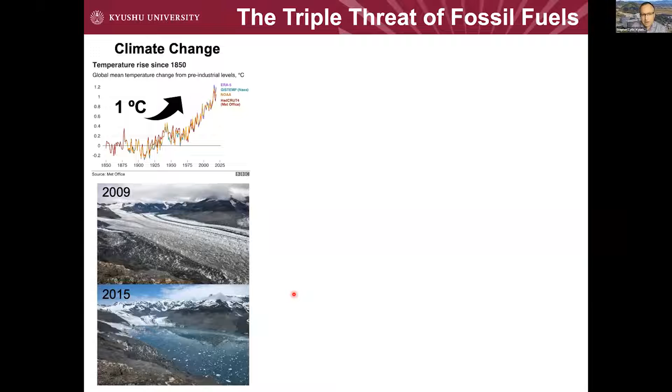So just for the context, and I'm sure you're all aware of this, but I like to think of this issue in terms of the triple threat of fossil fuels. I think everybody is very familiar with the concept of climate change and the problems associated with that. And this is a very serious issue. But we also have the issue of public health. When we're burning fossil fuels, we're releasing many particles into the atmosphere and other pollutants, especially PM2.5. And this causes serious issues with the air quality. This is a really major health issue in the world, supposedly killing something like 1 in every 6 people in the world, basically. The third threat of fossil fuels is energy security.

So this has always been an issue. We have things like the Gulf War and the oil shock in the 70s, which makes it difficult for some nations to get hold of sufficient energy resources. And especially at the moment, we're seeing this with the war in Ukraine, where basically Europe is very dependent on Russian oil, and when something happens, this becomes a big issue in terms of the politics and in terms of getting energy to people directly.

So the real thing we want to do is to stop burning fossil fuels. That's going to solve a lot of issues. And the solution at the moment is mainly through solar energy and wind energy, also through things like nuclear and tidal energy as well. But solar and wind are the main solutions. And the amount of installed energy of these types of technologies is really increasing now, which is very good. We have issues though with these technologies, so we can't electrify everything, and we need to use this electricity effectively.

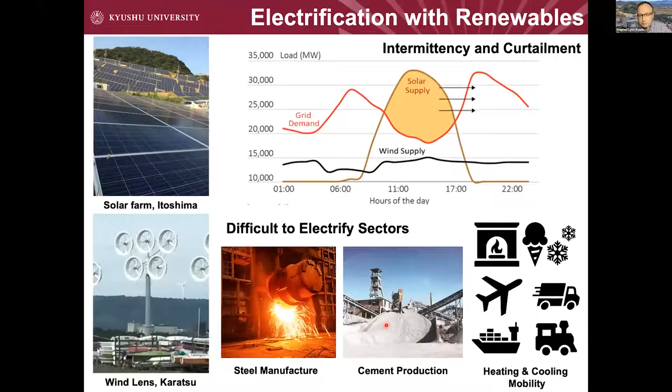So one of the energy storage solutions at the moment would be batteries. So lithium-ion batteries have really come on a long way in the last few decades, and they're kind of really a part of our everyday lives now. So I'm sure all of you are looking at a device which has a lithium-ion battery in it right now. So they can be used for large-scale storage.

There are issues with batteries as well, though. So batteries are really suited for short-term energy storage. So you can't use this battery to store energy over a period of months or over seasonal timescales. It's really for a few seconds or a few hours to balance out the grid demand and supply. The same with the battery electric vehicles. You're not storing energy in them for months and months. You're using the energy very quickly.

In addition, the materials that we use in batteries, so the main materials are lithium, obviously, they're called lithium-ion batteries, cobalt and graphite. These are all classed as critical raw materials. These are materials that are economically important but have limited supply. So as we scale up the production of battery electric vehicles, these materials will become bottlenecks. We may have trouble to scale up the manufacture of batteries around the world.

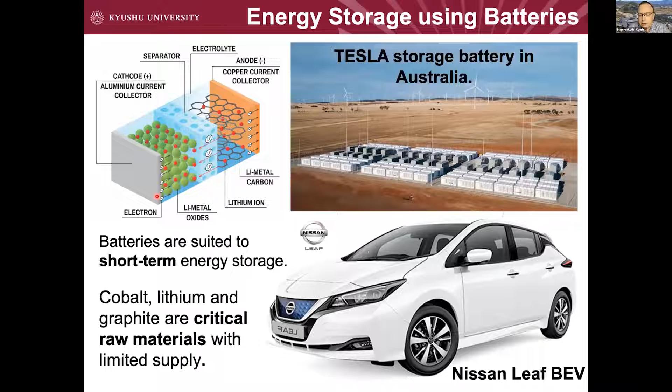Other issues with batteries include things like ecological damage. So we're trying to make a sustainable technology, but making some of the materials is not really sustainable. So when we're purifying lithium, we make these huge purification pools, and this can cause ecological damage to the environment. The cobalt that we use in batteries is mainly mined in the Democratic Republic of Congo, and a lot of it's mined illegally using child labor. So this is obviously not very good.

Also, batteries do sometimes cause fires. So if the battery is pierced, it can cause a fire, and this has caused recalls on several products, which has cost billions of dollars. For example, the Galaxy Note 7 from Samsung. So all these are issues, and at the same time, the demand for these materials and for the batteries is increasing rapidly. So something's got to give in the end. We can't keep on expanding indefinitely without solving all of these issues or trying to alleviate them.

So this is where we come on to hydrogen. So as an alternative to batteries, or a support to batteries, and also as an alternative to fossil fuels such as oil, coal, and gas. So this is where I get onto my title, so The Mysterious Island. So this was a novel by Jules Verne in 1874. And this was the first time, I think, that the concept of the hydrogen economy was really explored in literature.

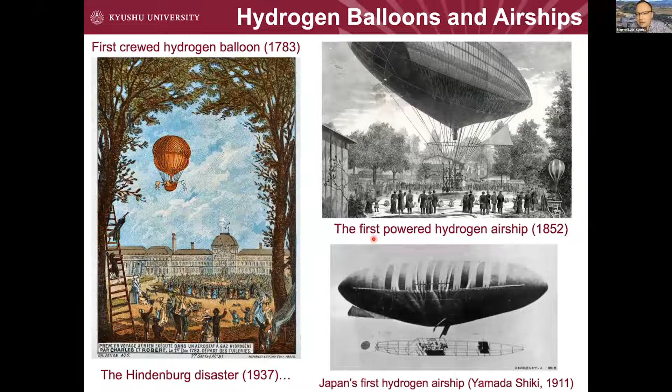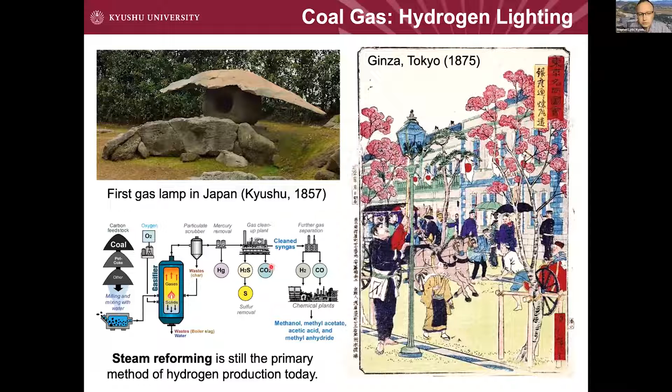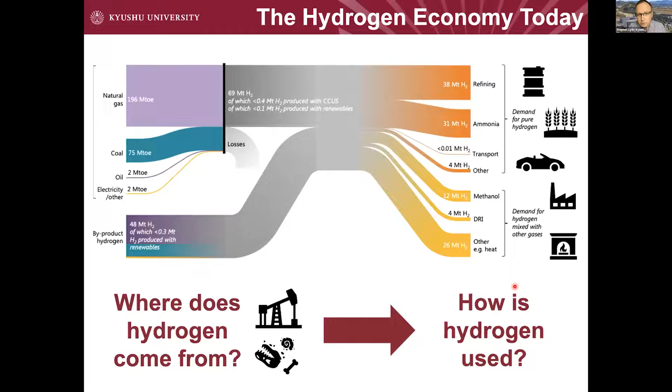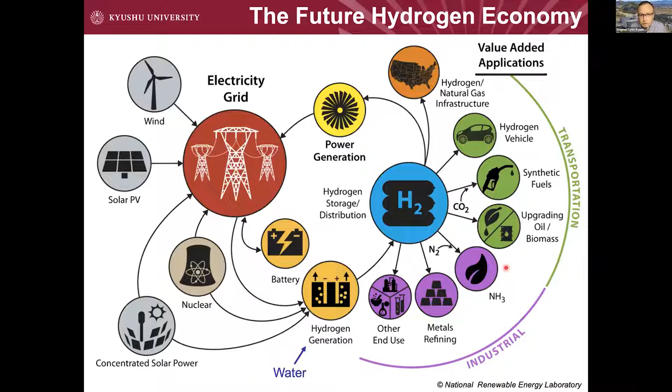In the future, we hope that we can start to really expand this hydrogen economy and use it in as many different sectors as possible, where we want to replace fossil fuels in the natural gas infrastructure. We want to switch that to hydrogen. In hydrogen vehicles, in making synthetic fuels and refining oil, as well as in industrial uses. So we want to use hydrogen for as many things as possible so we can avoid CO2 emissions.

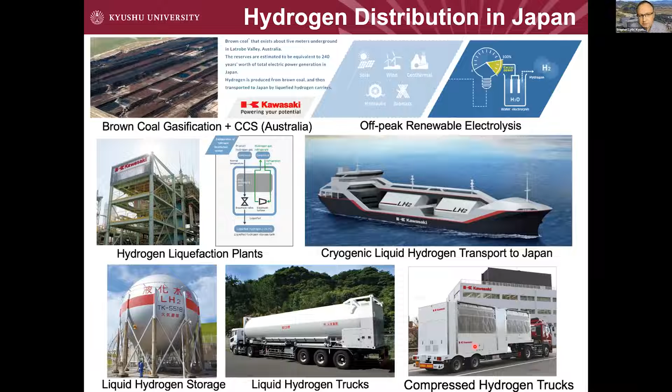Then that CO2 is planned to be sequestered underground, and then they would liquefy this hydrogen and send it to Japan in a hydrogen ship. Then they would basically store this hydrogen in central facilities in Japan, transport it around the country, and then use it in hydrogen filling stations, for example, or in industry where it's needed. So this is quite a large project, and it's already underway.

So now this ship has been built. This is the first liquid hydrogen shipping project in the world. So here you can see the big hydrogen storage chamber where they put the liquid hydrogen in. And currently, right now, or yesterday, the ship was just off Papua New Guinea on its way back from Australia to Kobe port in Japan, where it will deliver its hydrogen cargo. So this is a very exciting project, actually. But yeah, I guess maybe we can talk about more of that in the Q&A sessions.

Another method to store hydrogen and transport hydrogen, and this is another large project in Japan, is to use other materials to kind of stick the hydrogen onto. So this is a project called the AHEAD project, another big international and industry collaboration. In this case, they make hydrogen in Brunei. They react the hydrogen with toluene to create methylcyclohexane, MCH, and then they transport that liquid organic molecule to Japan in conventional chemical storage tanks, and then they supply it on the other side. This has the advantage of being able to use existing infrastructure for hydrocarbons, so we don't need special ships, and we don't need to invest money up front to store hydrogen like this.

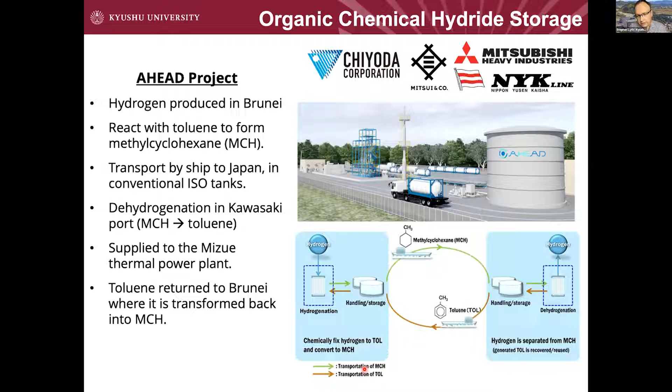Another kind of industry project, this is a Mitsubishi project where they want to use waste like sewage to make hydrogen. So you can use biological processes to generate hydrogen from waste. And if we can use this to power cars, for example, this would be a really nice green and closed carbon cycle way to make hydrogen. This is a filling station in Fukuoka, which is just up the coast from us, which uses this biohydrogen gas.

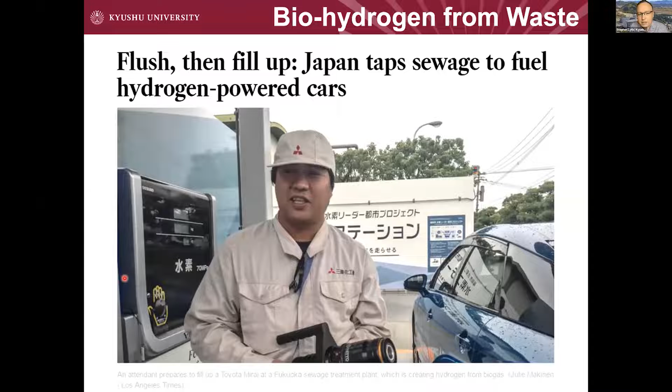So I want to talk mainly about fuel cells today. So a fuel cell is kind of a key in the hydrogen economy. It's a method to convert hydrogen into electricity. So this is a way that we can use hydrogen to electrify different sectors after we've stored it for a while. So basically, it's just reacting hydrogen and oxygen together in an electrochemical process, which is similar to a battery, and making electricity and heat and water.

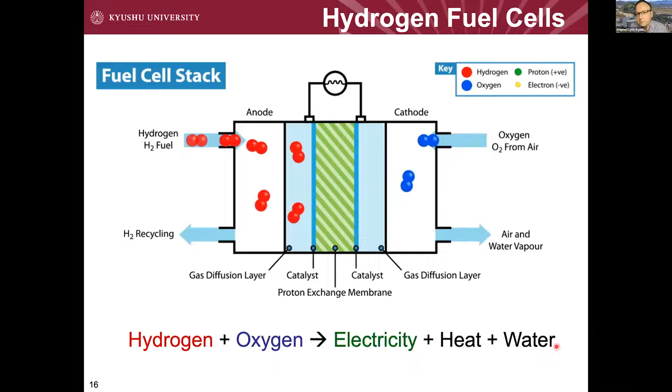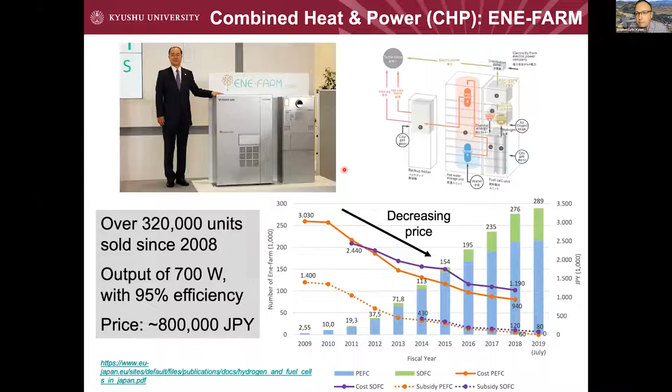So the biggest commercial project involving these fuel cells at the moment is the Enefarm. So this is an example of the Type S Enefarm, and now there's a new mini Enefarm. And these go on the side of your house, and they take city gas or natural gas, and they convert that natural gas to hydrogen, and then that hydrogen is converted to electricity and hot water. So they've already sold about 300,000 units, and the price of this is about 800,000 yen, which is something like $8,000 US. So quite expensive still at the moment, but they're very efficient, and you can make your money back at the moment in about 8 years. And the aim is to make that payback time more like 5 years.

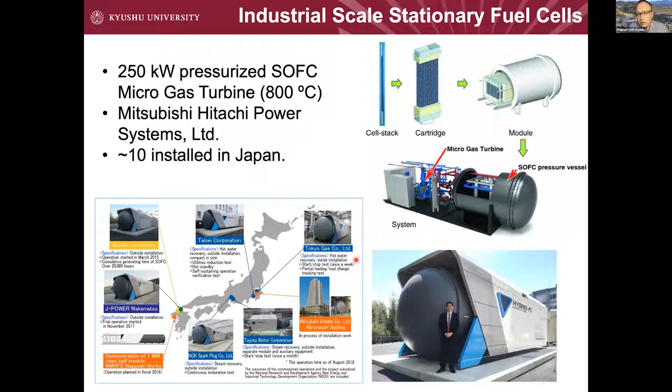There are also bigger fuel cells. So these are SOFCs, which are higher temperature fuel cells. This is the one just outside my lab with my boss, Professor Sasaki. This is made by a Mitsubishi Hitachi collaboration. And there are about 10 or more of these now installed around Japan, providing clean power, off-grid power effectively, for various different businesses. And now they're scaling up these to 1 megawatt scale units.

In terms of mobility, Japan's been at the forefront for quite a while in terms of fuel cell electric vehicles. So in the 90s, they were already making prototype fuel cell vehicles. In this case, they were using metal hydrides as a hydrogen storage medium. And more recently, we've switched to compressed hydrogen tanks. So Toyota and Mazda and Honda were all making prototype fuel cell vehicles.

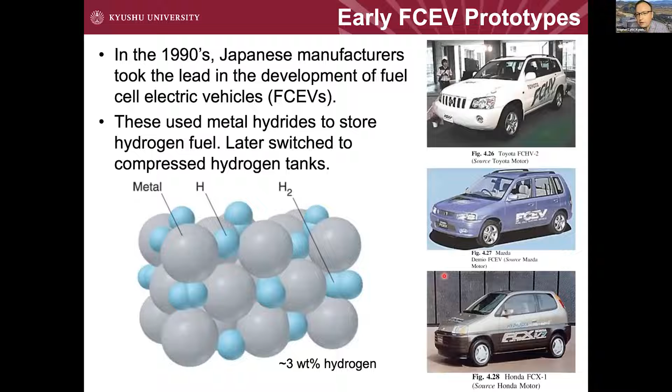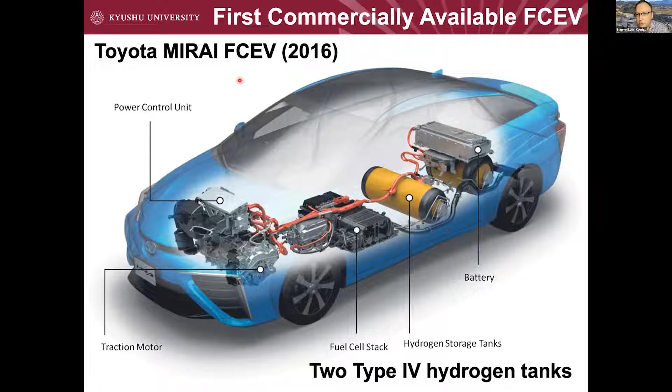And then more recently, Toyota made the first commercially available fuel cell electric vehicle in the world. So this is the Toyota Mirai, released in 2016. Mirai means future in Japanese. We're already onto the second generation of this fuel cell vehicle. So this is the second generation Mirai, which was released in 2020. They had an event in a local shopping center, so I could go and see it quite early.

And the advantage of this over battery electric vehicles is that the range is very good. So this one has a range of 650 kilometers, but it's actually driven a record of 1,360 kilometers on a single tank of hydrogen. The pressure is quite high, so 70 megapascals, hydrogen tanks, and it can hold about 6 kilograms of hydrogen, which can get you this 1,360 kilometers in ideal conditions. It's still quite expensive. It's like a luxury end car, basically around 60,000 euros or so.

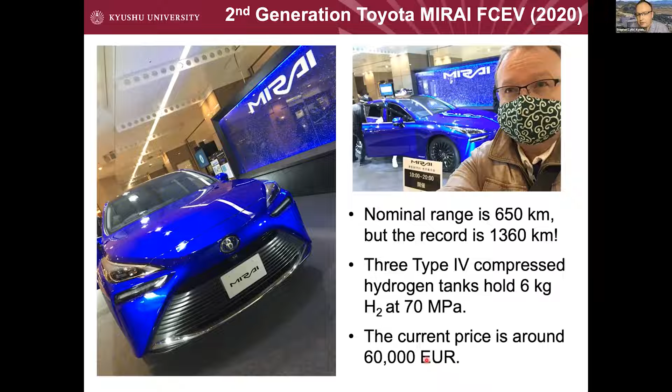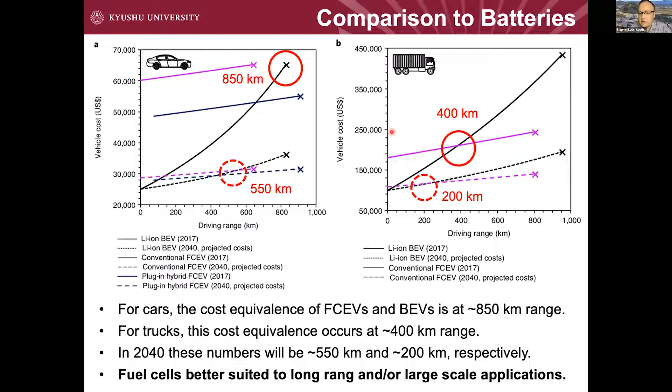But for a larger vehicle like a truck, that range comes down to 400 kilometers. So already today, for trucks and buses and trains it makes much more sense to use fuel cells rather than battery electric vehicles for larger vehicles. So now we already have a kind of a nice family of different fuel cell electric vehicles in Japan. So we had an event on campus last year where Toyota showcased their new fuel cell electric vehicles. So you can see this nice range of kind of large minivans up to buses.

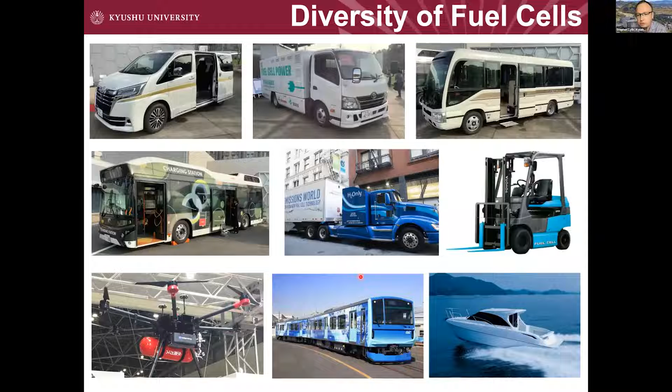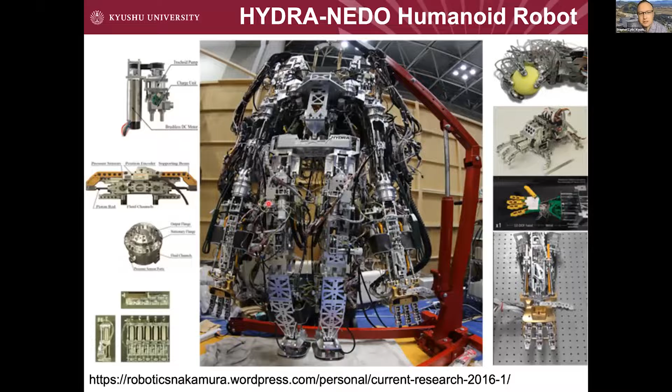The next generation of fuel cells, they're already planning this Toyota JAXA collaboration for the next crewed rover on the moon, I think in 2030. Robots may be a good application for fuel cells. This robot looks quite scary actually. This robot was powered by a fuel cell as well.

Okay, so I don't have really any time left, but Kyushu University has a reputation as being one of the focal points of hydrogen research in the world. We have many industrial collaborations, many different institutes and demonstration projects on the campus. We've got a Department of Hydrogen Energy Systems where you can come and learn about hydrogen at graduate level, many different events as well. So if you're interested, then do please come and visit.

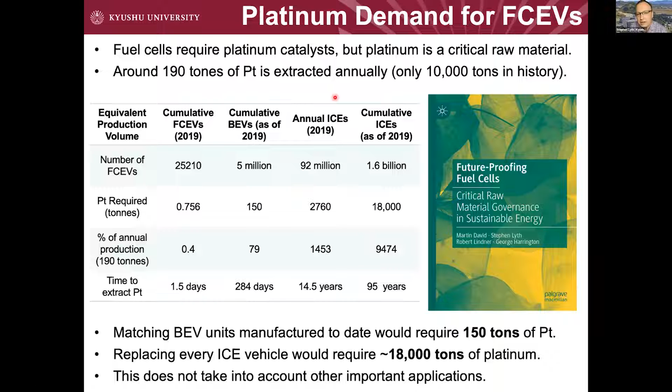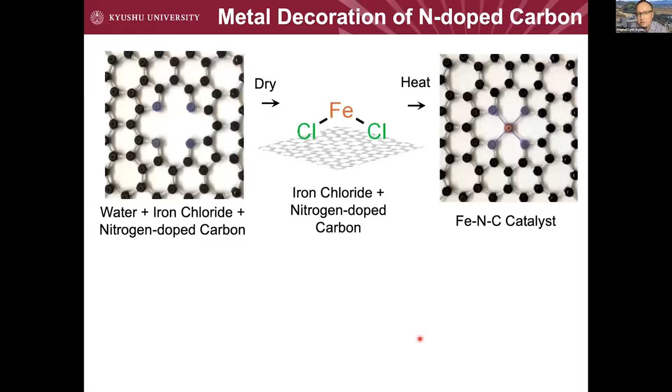And very, very briefly, my interest in fuel cells, a lot of it stems from replacing platinum. So platinum is a critical raw material and it's limited. So basically, I'm working on bio-inspired catalysts. We take inspiration from the catalysts in nature, like hemoglobin, for example, or chlorophyll. We try to recreate these catalytic structures embedded in carbon scaffolds. And we are making these catalysts in the lab in a very simple process. It's not so difficult, very similar to just making bread, for example. And eventually we can make catalysts which are not using platinum, but can still catalyze the oxygen reduction reaction. And we can use them in fuel cells, and they're comparable to commercial platinum-free catalysts as well. But maybe we can talk about that later on.

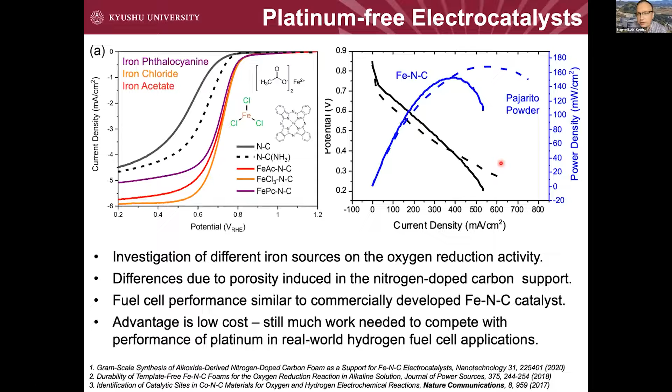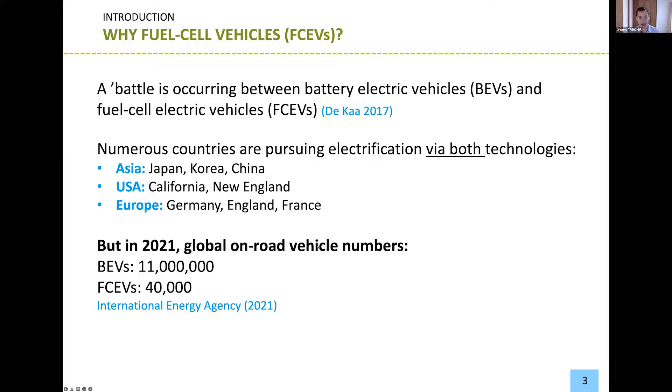However, there is very high interest in fuel cell electric vehicles in the passenger market. And that's because they have several advantages. So one is that they are very well suited for larger platforms. So we had the photographs a moment ago of trucks and buses, but also SUVs and four-wheel drives, for example. And this is important for big countries where people drive very long distances with large cars.

There's a lot of emphasis on using hydrogen in the heavy-duty market, for buses and trucks. However, the number of units that are sold every year for buses and trucks is very low compared to passenger vehicles. So if we can also deploy fuel cells in the passenger vehicle market, we're going to produce a large number of parts, which will then drive down the cost of these parts through economies of scale, which will have spillover impacts for other industries.

Another thing is that battery electric vehicles require charging stations. And these charging stations take up land. And in Asia, and cities like New York and San Francisco, there's not much land.

So that's why hydrogen fuel cell vehicles are attractive, because we can actually use the existing gasoline station infrastructure to serve these vehicles, which is very important because many people live in rental properties or multi-family apartments that cannot install a charger at home. And then we have, again, these attractive driving ranges and refueling time.

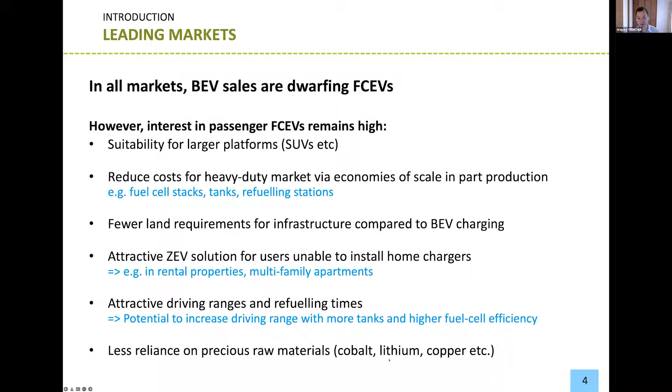So not only are fuel cell vehicles suited for driving long distances, they also can be refueled in just a few minutes. And then we also have these issues about critical raw materials that were raised a moment ago. Fuel cell vehicles, having smaller batteries, use less of these materials. So this is very, very important, probably for the future when these limited supplies are strained.

So California, Germany, and Japan are three countries that I focused my research on. And these are three leading markets, and that's because, for many decades, they've led the world in terms of testing vehicles and developing vehicles, in terms of selling these vehicles, and in terms of building the refueling station infrastructure. And Japan is especially special in this trio, because we have two companies, Toyota and Honda, which currently are producing vehicles.

Honda is currently having, we could call it a sabbatical, maybe a little holiday. They're doing their homework. They're rumored to come back into the market this year. There's a long history of research and development for fuel cells for both stationary and mobile applications in Japan. And so they're a big part of the government's electrification strategy for road mobility.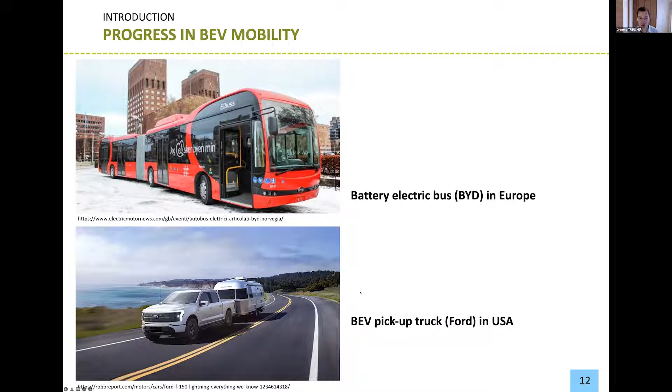Look at this. This is a pickup truck. This is a big, big four-wheel drive produced by Ford in America, available this year with a driving range, if I'm not mistaken, of about 300 kilometers. Extremely powerful. Batteries are making amazing progress. They're actually becoming much faster and easier to produce. And the progress is much faster than many people expected, which means that we have to revise this thinking here.

The idea is that probably hydrogen would actually be suited for very, very heavy duty vehicles like trains and ships. And yes, we can use hydrogen for sedans, and yes, we can use them for trucks, but actually batteries are the competition that's increasingly coming in here. So due to these improvements in battery performance, battery electric vehicles are going to perform many roles that we thought hydrogen would perform. So hydrogen is being increasingly pushed towards this heavy duty space, like ships, very, very large trucks like you'll see in America, and also trains.

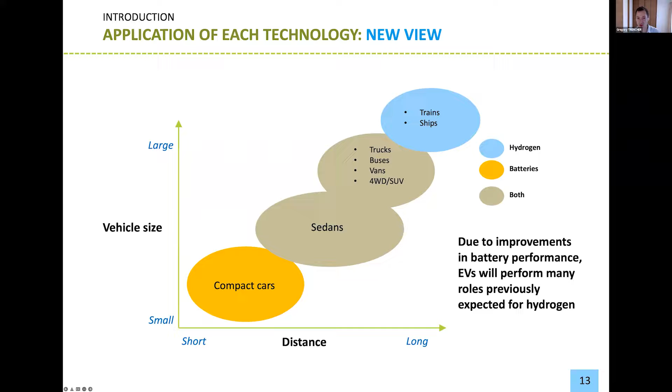I'm not telling you all that we're not going to see hydrogen in this sedan space or this space here. That's not my position at all, but I think we shouldn't take for granted that hydrogen is very suitable for these sectors.

So let's look at the barriers to the diffusion of these vehicles. It might get a little bit depressing for you here, so please put on your seatbelt. We have 3 countries that we're going to be focusing on: Germany, Japan, and California. And so a question is, how can we increase the supply of fuel cell vehicles? To do this, we should be thinking about how to accelerate the technological progress and how to lower the costs of production. So in Germany and Japan, basically the strategy has been for the government to be very kind to industry and to help them by supporting their R&D.

And the effect on stimulating fuel cell vehicle production is very uncertain. And the government works with industry to develop testing platforms and to help the industry competitors, for example, getting Toyota to talk to Honda, who are competitors. And again, the effect on stimulating FCV production is very uncertain. Japan has had another approach where Toyota has voluntarily decided to open up all its patents and say to companies, if you want to use these patents to produce fuel cell vehicles, you can. And they also supply fuel cell and tank systems to other companies. Again, the effect on stimulating the fuel cell market is uncertain.

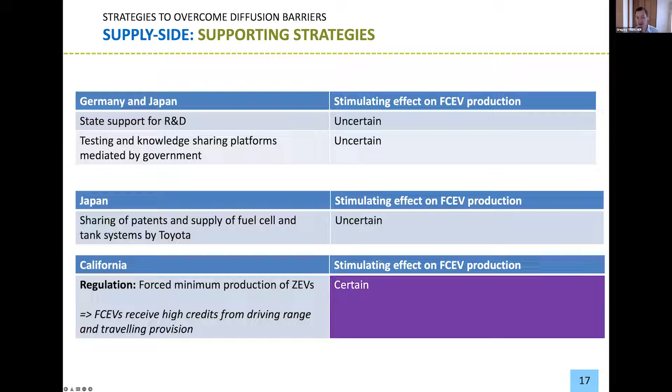Whereas in California, the government uses regulation. They say to a company, including Toyota, if you want to sell cars in California, you have to supply a minimum ratio of zero emission vehicles. That can be batteries or that can be fuel cell, you choose. But the idea is this is forcing these car makers to supply a minimum amount of electric vehicles. And then fuel cell vehicles get a reward because they get a lot of credits because they can drive a long way. So California's been actually very successful here, whereas Japan and Germany have been unsuccessful in stimulating production.

So the situation is that fuel cell vehicle production is very limited and it's not enough to drive the market growth. So in Japan, we only have 7,000 of these vehicles driving around, but the government was aiming for 40,000 by the end of 2020.

And that also doesn't account for the previous historical figure, which was, I think, set for 2013, 2014, where the government was aiming to have a large number of fuel cell vehicles on the roads. So historically, we keep missing these targets. Today, only Toyota is producing the vehicles. Honda has suspended its vehicle production.

I was in a seminar recently, and there was a rumor by a representative from Honda that said, very confidently, please look forward to the end of this year where we're going to give you further information. So we can expect them to come back into the party. They had some technical problems, which we think would be behind their suspension of the production.

Germany, nobody is producing fuel cell vehicles in Germany. This is a big problem, because that means if you're a politician in Germany saying we support fuel cell vehicles, that basically means we support Japanese makers and Korean makers, which are the competition. And so it really is not working in Germany. We need these German car companies to come into the market.

So BMW finally is expected to release an SUV, but it's going to be in very, very limited volume. Their focus is on battery electric vehicles. So Germany really is focusing on battery electric vehicles with a very limited role for hydrogen. This has changed historically. So why is Germany and why are other countries choosing battery electric vehicles? That's because we have all these barriers that are much lower in the BEV market.

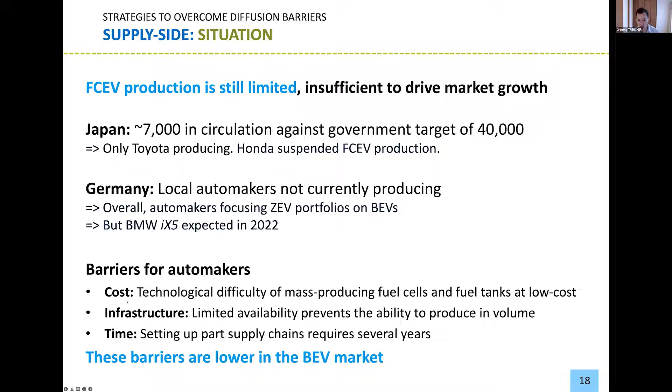The barriers include cost. It's very difficult to produce fuel cells in high volume at a low cost. The infrastructure, there's not really enough refueling stations to allow people to drive around without inconveniences. And that stops these companies from supplying the vehicles. And then time, it takes a long time to build the part supply chains, because fuel cell vehicles contain a very large number of parts, very comparable actually to a regular gasoline vehicle.

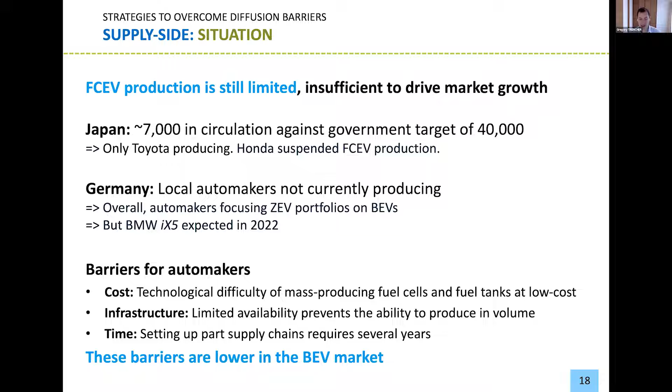Whereas a BEV contains fewer parts, so the supply chains are much easier, and you can actually just profit from existing supply chains, existing networks in the market. So these are big barriers that are very expensive and time-consuming to overcome. Infrastructure. This is another important thing. We have to build refueling stations, and we have to do this at a low cost.

It costs about 1,000 yen per kilogram, and in the new Mirai, this will cost you 6,000 yen for a driving range of about 700 kilometers. So it's about the same running cost as a hybrid vehicle. So Japan has 140 of these, but included in this number are some of these truck stations. So it's not really a refueling station.

It's kind of cheating, in my opinion, because there's no refueling station here, but the truck goes there once a week. So on the map, they tick this and say this is a station. So we have 140 of these. Their goal is to build 320 by 2025. We're on track to achieve this. And we're looking to build 1,000 by 2030. That's the same as California, by the way, 1,000 by 2030.

So the government in all these three countries, Germany, California, and Japan, basically supplies 50% of the construction costs. So that's working. And then we have operation support, where Germany does nothing. So they have a very low number of vehicles using these stations. The stations are going bankrupt, but the government doesn't help them. Whereas in Japan, the government helps them.

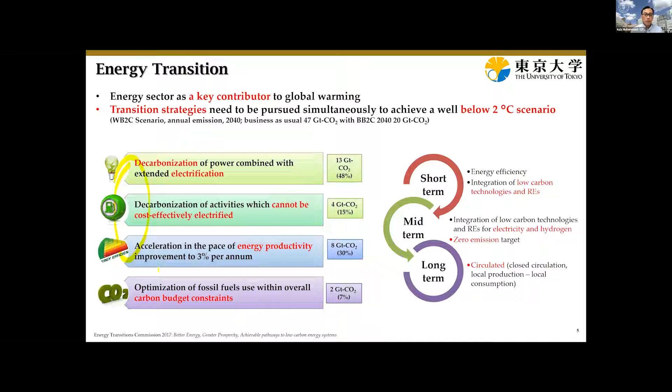So when we are talking about energy transitions, minimally we will cover 4 different pillars, including decarbonization of the electrified sectors, which covers, I think, the biggest energy amount, and also decarbonization of non-electrified sectors. The third one is correlated with energy productivity or energy efficiency, how we can improve the energy efficiency of our systems. And finally, in case we cannot have these three options, how we can select a scenario which produces minimum CO2 or GHG into our atmosphere.

And unfortunately, when we are dealing with energy transitions, we are also dealing with several concerns, including environmental, economic, and social aspects. For the environmental, we have carbon. We also have the correlations among energy, air, water, soil, food, and etc. For the economic, we are dealing with job creation and so on. And for the social, we are dealing with culture and also mindset.

And I think this is the big picture when we are talking about the energy system in the future. I think there will be big changes in the future. Currently, especially for electricity, it is covered mainly by baseload generators, including coal, gas, geothermal, hydro, etc. But because we are predicting that in the future the renewable energy share will increase and the share of fossil-based power generators will decrease, it means that the baseload generators will also be decreasing in the future.

And now currently we are dealing with problems like curtailment of renewable energy, because of the limitations of the grid to adjust to or cover the fluctuation itself. But in the future, maybe we will not need to do any kind of curtailment anymore. How can we facilitate maximally or optimally all the resources available, especially from renewable energy?

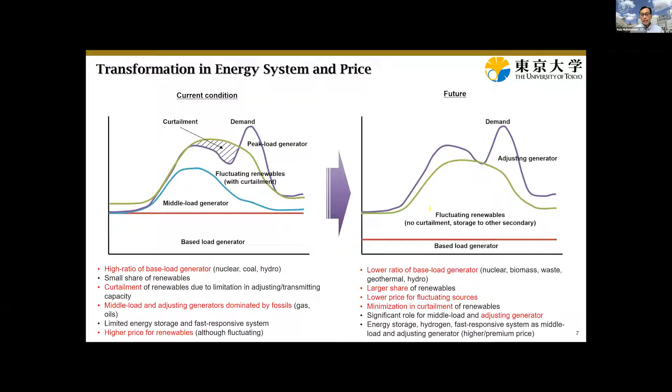So it means that what we would like to do in the future is to have very responsive energy systems to cover that. Whether we would like to have secondary energy resources, including electricity, how to store them, and also how to facilitate the charging and discharging, and also maybe more long-term energy storage, including hydrogen, ammonia, or any other energy storage.

And when we achieve zero carbon in 2050 or 2060, what we would like to have after that, we also need to figure out. So in the net zero condition, at that point, we can have optimization of renewable energy, so maximize all the renewable energy sources available in our regions.

And also the important thing is that primary energy resources, unfortunately, will not be used directly in our daily life. We cannot imagine that we use hydropower for our house, actually. So basically, we use the electricity generated by hydropower, by wind turbines, etc., or chemical fuels, as the professors mentioned previously, like hydrogen or hydrogen-based fuels, including ammonia, which will also be a very strong candidate in this case.

And also, finally, when we are talking about CO2, now we are dealing with the problem of positive CO2 generation. But in the future, we are also assuming that we will be able to control CO2 generation, not positive, not zero, but we can also have negative CO2 generation. So we can control whether we would like to have positive CO2 generation, zero or net zero CO2 generation, or finally, maybe negative CO2 generation.

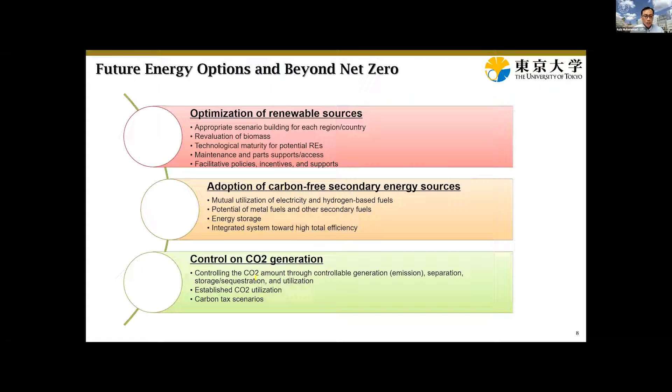Yeah, there are some aspects that we can have over the years, including CO2 utilization, carbon tax scenarios, etc. And the important thing is that most of the countries in the world have set a zero carbon target in 2050, 2070, or something like that. The most important thing for me is that we need to have adaptive energy transitions.

Because every country, every region actually has different conditions, different mindsets, different cultures. So it means that successful stories in one country cannot be copied directly to another country. So a success story in Europe may be the reference case, but it cannot be copied directly for tropical countries. Tropical countries will have different conditions. So that's why we need a wiser and more adaptive energy transition in this case.

And the important thing in this aspect is how we can change our behaviors. We shift our consumption behaviors, not only to be the kings because we are the consumers, meaning that we need to be served. In the future, we will not have this kind of mindset anymore. We need to have flexible, dynamic, adaptive behavior, because we also have responsibility to the energy systems and our society.

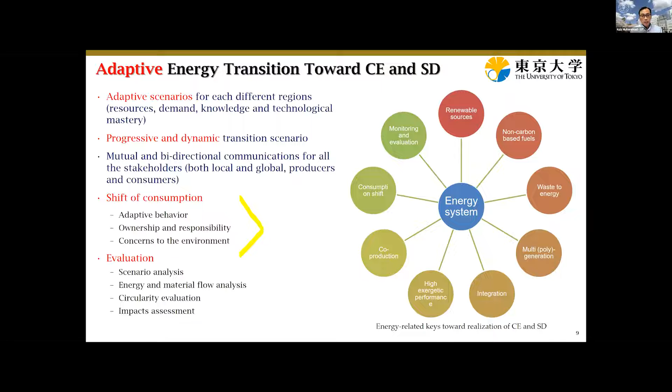And so that's why there is the idea of demand response. When we set a different or dynamic price for electricity and energy, we can behave accordingly, according to the different price of electricity or energy. And also this is the energy transition's correlation with the circular economy, but I would like to skip it. This is the connected community energy management that we are still working on.

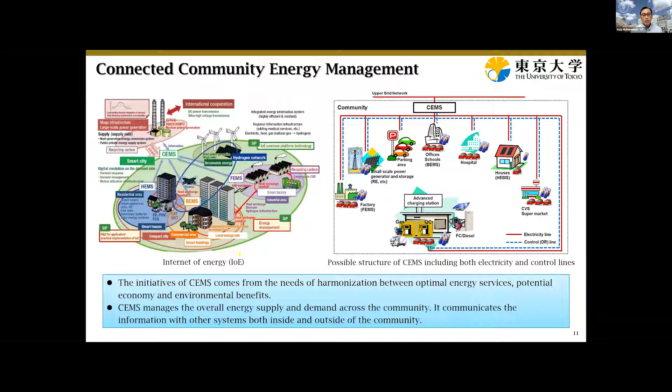In the future, all of the stakeholders, producers, transmission, distribution, storage, and also the consumer itself will share big data together. So it means that we can have more accurate predictions, or maybe also an open market together. So that's why the idea of prosumers, as I have mentioned previously, will also be valid in the future.

And this is the smart energy system also, but I think I just have a limited time in this case. This is the smart electricity grid. And when we would like to talk about the carbon-free secondary resources, previously I mentioned the primary energy sources, but currently the more convenient energy for consumption itself is basically the secondary energy resources.

So what kind of secondary energy resources are quite promising for us? In my opinion, we have four different secondary energy resources here. So we have electricity, which I think is the most convenient one. And then we have also hydrogen-based. For the chemical fuels, basically, we have two options, carbon-based or hydrogen-based, or the mix between them.

But when we are dealing with carbon-based, it means that we are still dealing with CO2 emissions. So in this case, how we can shift from carbon into hydrogen-based chemical fuels. We can have hydrogen, also ammonia, or any kind of derivatives from this. And we also have another option, the metal fuels: aluminum, iron, manganese-based materials. So we can use these metal fuels and oxidize them.

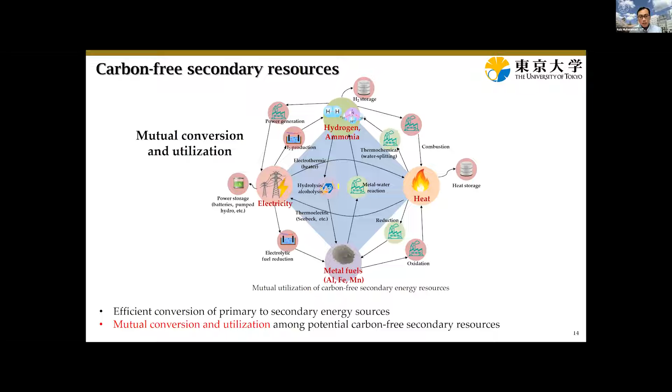We can get heat from that, and we can generate electricity. We can also generate hydrogen from that. And finally, we also have heat. The problem is how we can facilitate the mutual conversion and utilization of these four different forms of carbon-free secondary energy resources. That, I think, is the main key technology in the future.

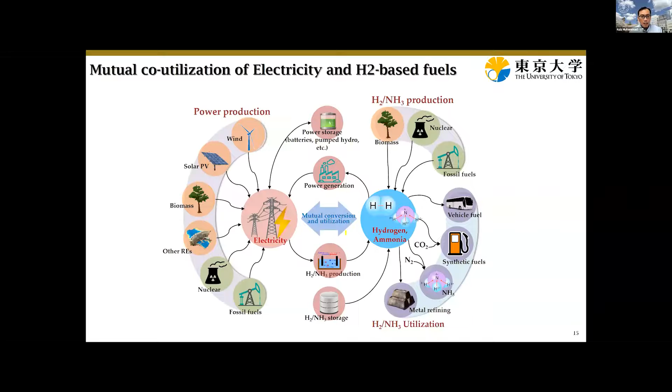The technology for converting or harvesting energy from biomass is basically quite mature. But the problem is how we can have scenarios that facilitate biomass in our energy systems. The characteristics related to storability and flexibility are very important for biomass. And in the future, adjustable energy sources may have a better price compared with unadjustable or fluctuating energy sources. So because biomass is storable and quite flexible, it can enjoy a premium price in the future.

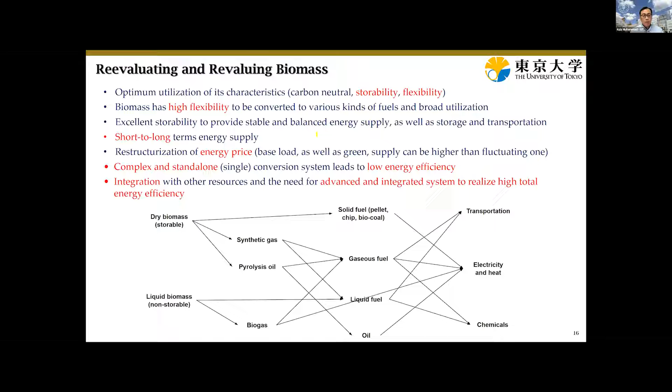And this is the mutual conversion among the secondary energy resources, including electricity and chemical energy. We have power-to-gas technology, especially when we look at the German case. In northern Germany, there are a lot of wind turbines. But unfortunately, the electricity generated in northern Germany cannot be delivered to southern Germany because of grid limitations.

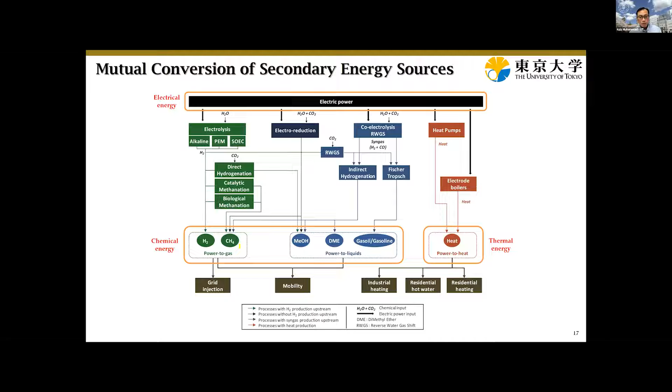So the idea is how we can convert the surplus electricity generated in northern Germany to gas, to hydrogen, also to methane. Then this hydrogen and methane can be injected into the gas pipelines in Germany, so it can be delivered to the consumption site. And we also have thermal energy. I would like to skip this one because Professor Late and Professor Trancher have mentioned it previously.

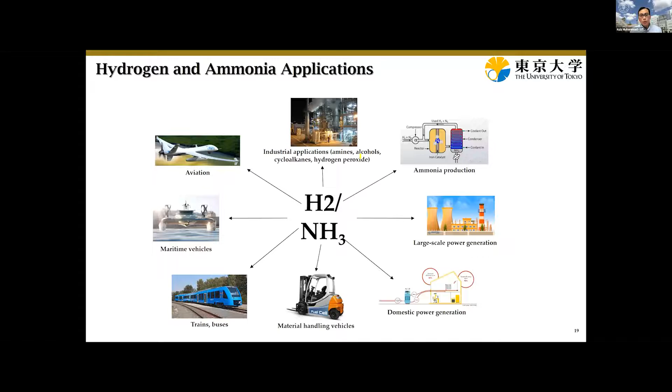And the great utilization of hydrogen itself is how we can replace the current power generation based on fossil fuels, coal, gas, etc. And another quite important topic is how we can deal with the utilization of electric vehicles.

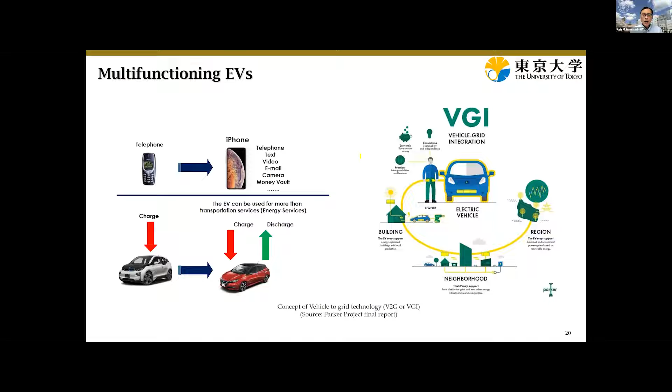And this is one research that we have done previously. We have about 10 years of research related with vehicle-to-grid utilization, whether in Japan or also in Europe, especially when we had one big project in Denmark. It correlates with any kind of vehicle-grid integration. As you can see, Denmark is quite a flat country, and it is very challenging for them to build any kind of high-energy electricity storage, like hydropower, etc.

So basically, the idea is how we can motivate the citizens to buy electric vehicles, and the electric vehicles can be utilized for ancillary services to the grid. There are different services that can be provided by electric vehicles, whether connected directly to transmission, distribution, or renewable energy services. But basically, we are dealing with qualitative services here. That's why the price of the service itself is really quite premium, quite high.

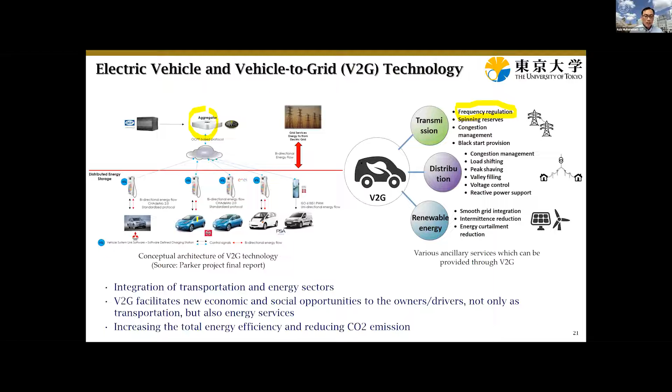In the case of Denmark, we can enjoy up to 100 times the regular price of electricity. So in 1 month, in our study case, the owners of electric vehicles providing frequency regulation services can enjoy about 20,000 yen as passive income. That's why it is really a great income for the owners or drivers. We can have aggregators that communicate with all of the electric vehicles, and electric vehicles can finally behave for charging and also discharging.

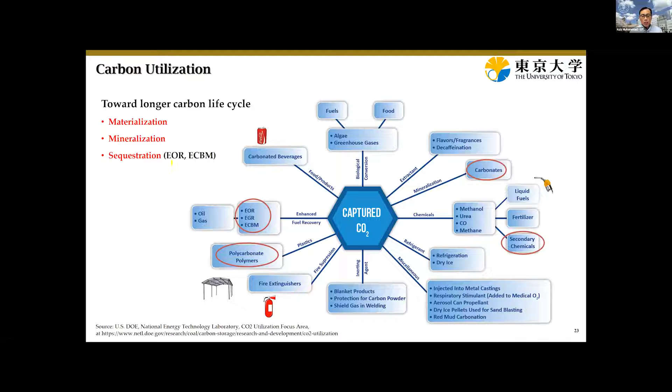Another topic is related to carbon utilization, because there is a great challenge for carbon sequestration or carbon storage, especially the geological one. How can we guarantee that there won't be any leakage, or guarantee the stability of the carbon sequestration or storage itself? So from 2010, the trend has been changing, and we are moving to carbon utilization: CO2 utilization through materialization and mineralization, and in the case of sequestration, we can use it for EOR, enhanced oil recovery, or coal bed methane.

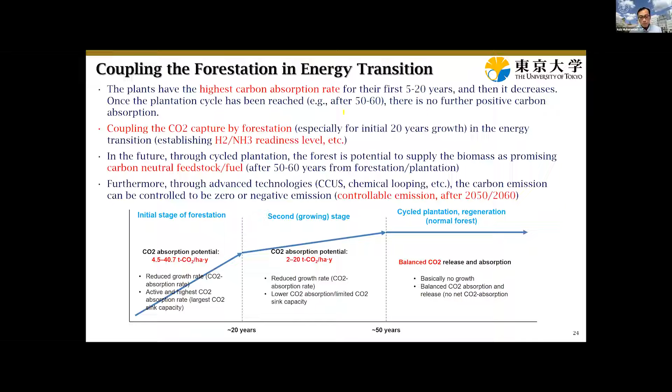And also, now that we are doing energy transitions, coupling afforestation with energy transitions is quite a good idea, especially for some Asian tropical countries, or maybe the southern part of America. I think this is a big opportunity to couple afforestation with energy transitions, because during the energy transition we still emit CO2. And that's all for my presentation today.